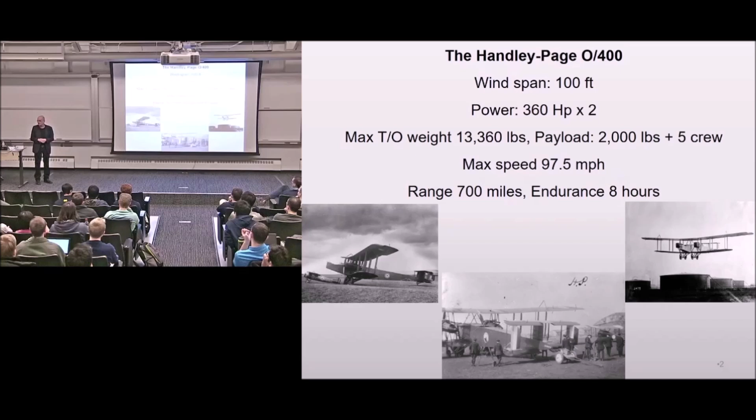So you look at this impressive machine. This was a World War I era bomber that the British built. It was mighty, and it was called the Handley Page O/400. Pretty impressive machine, actually so impressive that for many years later, every big airplane the British built, they called a Handley Page, even though it was built by other companies.

It turns out that during the service of this airplane, as pilots were accelerating and reaching a certain speed, the airplane started shaking dramatically. The shaking came from the tail, and it was so bad that, as a report states, the experience for the pilot is terrifying. There's a reason I used red font for terrifying, because we're going to talk a little later about the psychological issues involved with flutter and aeroelasticity.

So they called a genius of the time by the name of Frederick Lanchester. I'm going to give you some homework: go and look at Wikipedia and look at Lanchester. This is an absolute genius and polymath who did everything from designing cars to developing speed regulators for steam engines, to inventing operations research. He is considered one of the two creators of operations research, and also wrote the first books on aeronautics, inventing vortex theory.

Remember flight dynamics? How many of you took a class in flight dynamics? How many of you know what the phugoid is? He created this term, actually. So this is absolutely... that's what they call him. And he looked at this, and wrote the first report called Torsional Vibrations of the Tail of an Aeroplane, and the British followed through with this.

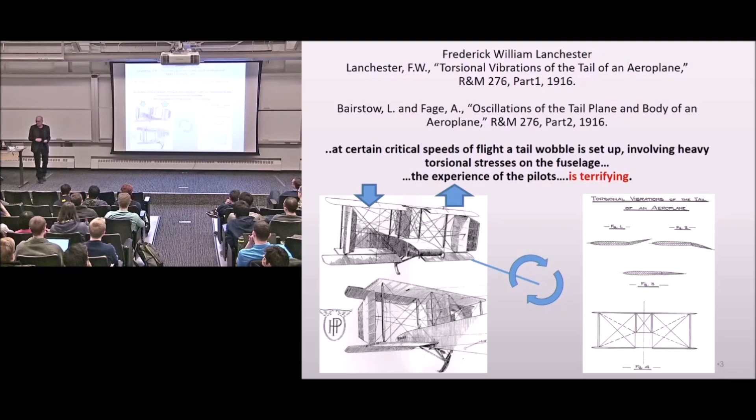This is the first reported incident of what we call flutter, or flutter instability, that interaction between structural dynamics and aerodynamics in a dynamic way on an airplane. So in order to describe the structural dynamics of an airplane, we usually take a very sophisticated model—this is a B-2 bomber, and you can see a very sophisticated mathematical model of it.

We usually don't use for aeroelasticity the very detailed finite element model. We look at the essential motions, so we use a set of shapes of motion. Here you can see some of the low-order mode shapes. I would assume all of you know what mode shapes and natural frequencies of structures are—these are the shapes at which the structure would oscillate if left on their own without damping.

So basically, in order to understand what this is doing, let's describe the motion as a superposition of these shapes. These will serve as what we call generalized coordinates. If I know how much of each generalized coordinate there is—generalized coordinate number one is some shape times how it changes with time, another shape times how it changes in time—these are the generalized displacements. By this superposition, if I know these generalized displacements, I know what this airplane is doing. So I'm going to work with a set of mode shapes and natural frequencies.

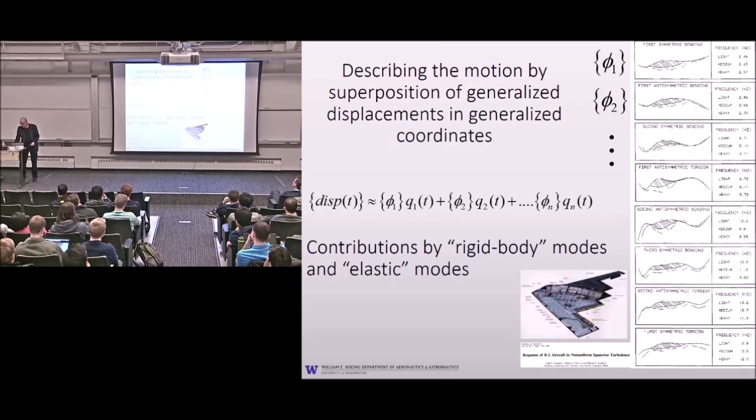Each one of them has its shape, each one has its natural frequency. So the equations of motion for a structure that is linear, limited to small perturbations, when Laplace transformed, will have an inertia matrix, a damping matrix, and a stiffness matrix - that's the structural part.

And since the whole thing is moving, and since aerodynamic forces depend on shape and motion, on the right-hand side you will have an aerodynamic matrix. This is for what I would call self-induced aerodynamic forces - they depend on the motion - and then there are going to be forces that are aerodynamic due to gusts, and some external forces.

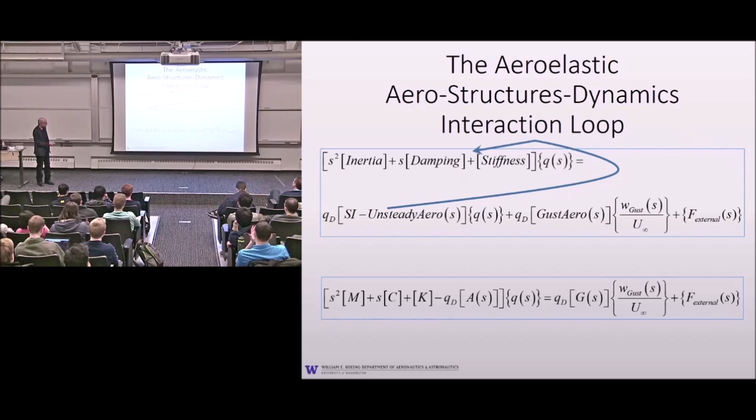So here you can see the inertia terms, the damping terms, and the stiffness coming from the structure. And you see the aerodynamic terms moving to the left-hand side, basically modifying the dynamics of the structure. On the right, you can see the excitation coming from gust and from external forces. So in a way, you can view it as a kind of feedback mechanism of nature.

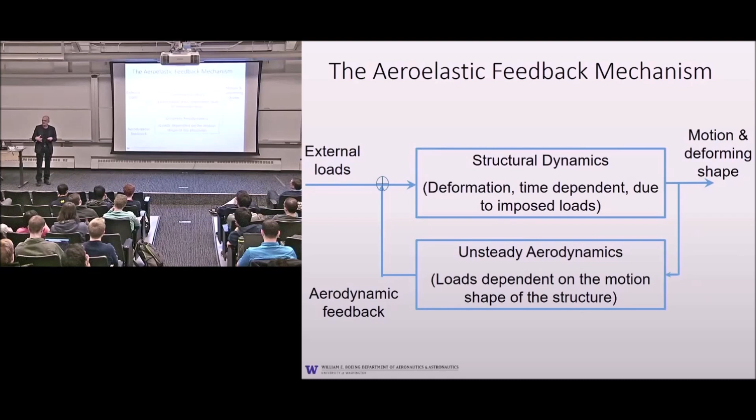Here is the structure. The structure is a system that if you apply force to it, it would respond by some motion. The motion will be a combination of rigid body motion - the whole thing moving up and down - and deformation. But if you have aerodynamic forces, they depend on the motion and the deformation, and then they feed back and modify the forces acting on the structure. So you have a kind of natural feedback loop.

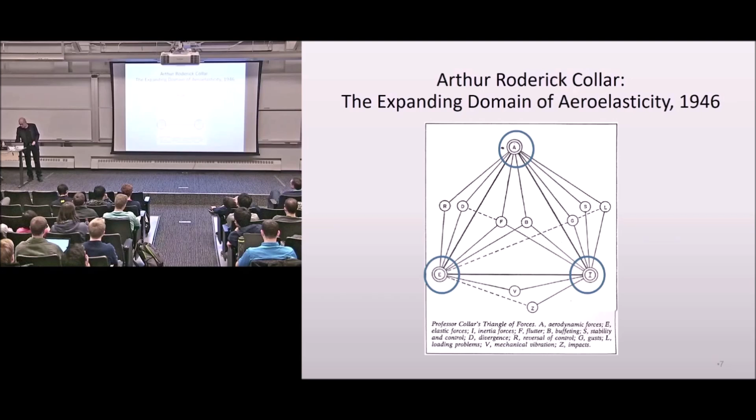And indeed, since the British did pioneering work on aeroelasticity, and some of the greatest contributions were done in the 20s and 30s by the British, it was natural that a British professor of aeroelasticity, A.R. Collar, in 1946 suggested what we call the Collar triangle, saying aeroelasticity is about the interaction between elastic elements, inertia elements, and aerodynamic elements, and all these lines describe different phenomena associated with these interactions.

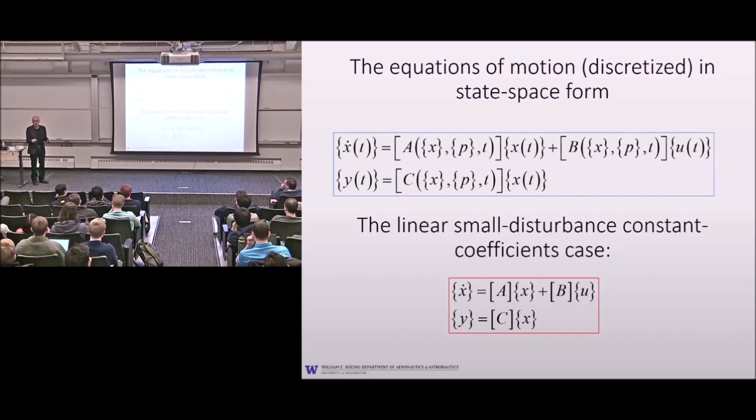In general, this A matrix, B matrix, and C matrix can be dependent on the states. They can be dependent on outside parameters like what Mach number you fly, what you do with the airplane, and they can be dependent on time. But we are going to limit ourselves here to the simplest case, which is constant coefficients.

I hope you all remember from your basic controls class that the stability of a system like this depends on the eigenvalues of this matrix A. They are also called poles, and in general they will come in complex form - so they can be either complex, coming as complex conjugates, or they can be real. The stability of the system is determined by the real part of these poles.

So here you can see the real part and the imaginary part. When the real part is positive and the imaginary part is finite, you have a diverging oscillation. When the real part is negative and the imaginary part is positive, you will have a converging oscillation.

If the pole is real and positive, on the real axis, you have a divergent exponential motion, and if the pole is real but negative, you will have a convergent exponential motion. And if the pole is purely imaginary, then you have simple harmonic motion that does not decay.

So basically, when you look at the mathematical model of a dynamic system, you look at the poles, you look at the eigenvalues, and you look at the real parts. Then, depending on these, you know if the system is stable or not.

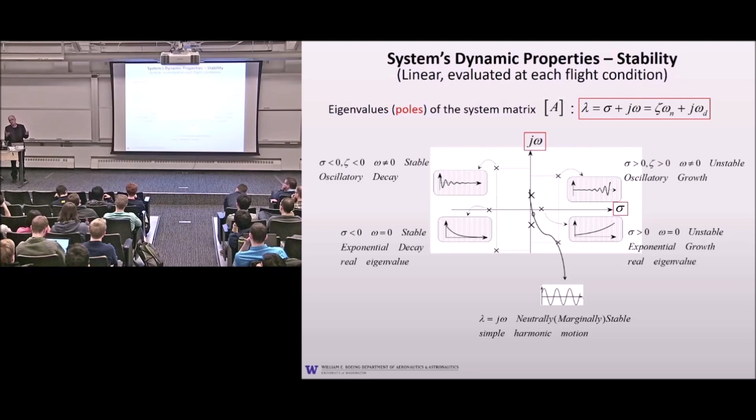You can have all the eigenvalues, all the poles stable with negative real parts. It's enough that one of them has a positive real part and the system will go unstable because there's going to be an oscillation. The limit between unstable and stable, when the system behaves in purely harmonic motion, is what we call flutter. In colloquial English, when you say flutter, you mean the whole unstable behavior once the system goes unstable.

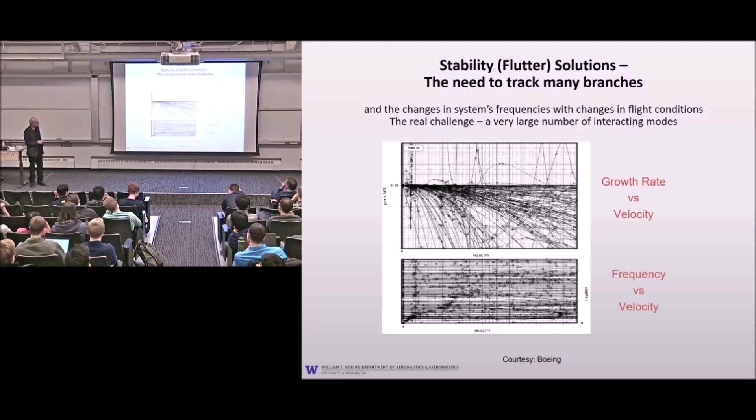Just to give you a taste, I plotted some figures, though usually it's kind of dirty and complicated. This is a Boeing plot of a 737, showing how many eigenvalues and poles you have to track and how they change as you increase the speed. When there is no speed, everything is stable since there are no aerodynamic forces. But as you increase the speed, at some point some of these poles will become unstable and the system will diverge. So it's a huge challenge when you analyze, optimize, and design controllers to deal with systems that have so many poles, so high an order.

When you look at how the system becomes unstable as you increase the speed, it's always a branch, always a pole that crosses from stable to unstable. The question is how it's going to cross.

On the left is what we call violent flutter. This is the damping in a pole. Very close to the flutter speed, you still have a lot of damping in the system. Just imagine a flight test or wind tunnel test: you increase the speed and check, increase the speed and check. Very close to the flutter speed, the system is still well damped. Then you push the speed just a little bit more, and suddenly you are already very, very unstable. Within a fraction of a second the system will disintegrate. I'll show you a movie to give you a feel of what we call violent flutter.

Moderate flutter is when, as you increase the speed, you begin to see a decrease in damping well before it actually becomes unstable. So when you do testing, you can do some kind of extrapolation. You feel the system approaching instability, and that's much easier to deal with when you do flight tests, where the safety of the airplane is on the line. This is what we call moderate flutter.

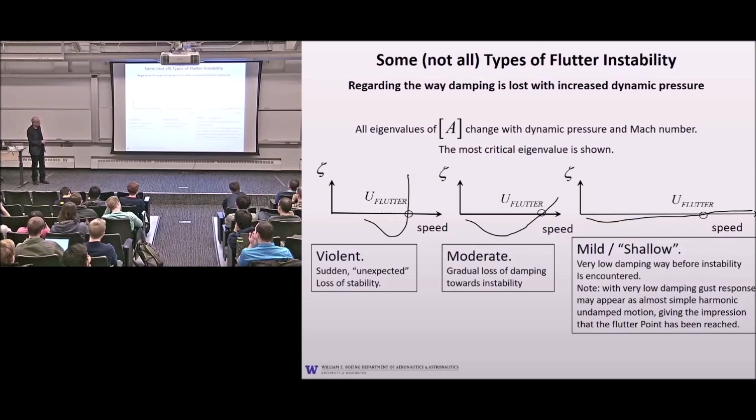This is stuff I'm telling you not only to give you a basic education about aeroelasticity, but because it matters for the issues we're going to discuss: active flutter suppression, and how to apply active control to a system like this. Whether you're controlling a violent mechanism, a mild mechanism, or a shallow mechanism has enormous significance.

Since no system in real life is really purely linear, there are always some nonlinearities. You can encounter the same thing in aeroelasticity. I'm not going to talk much about nonlinearities in structures—this is a fascinating area. Nonlinear systems can behave in crazy ways and are not easy to deal with. But just to give you a taste of one particular nonlinearity, imagine a system where as you push it more and more, you face more resistance.

For instance, imagine an airplane wing oscillating with larger and larger oscillations—the damping of the system, just because of the grinding of parts, becomes higher. Or it begins to hit against some structural resistance and becomes stiffer. So what can happen with a mechanism like this: let's say I fly faster than the flutter speed. The system is unstable, and the airplane wings and parts begin to oscillate.

But as they oscillate at larger and larger amplitudes, they see more and more stiffness. You see the force deformation, the steeper slope here means the system resists it more. So what will happen is something like this: it begins with an instability, the amplitude builds up, but that is against the stiffening of the structure, so at some point a balance is reached, some equilibrium, and the system will not diverge completely. It will keep oscillating with a limited amplitude, and this is a typical example of what we call a limit cycle oscillation.

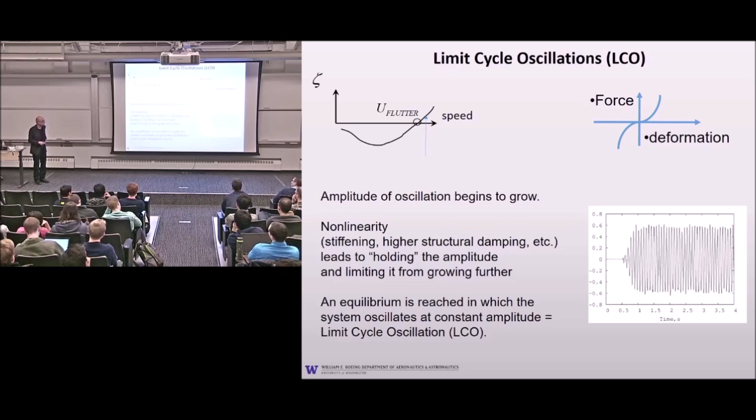Again, it's interesting to know about it, but it will have relevance to some of the stories that I'm going to tell you a little later.

So then how do we define Flutter? We have to agree on the term. We can define it as destructive linear Flutter, where if you cross the Flutter speed, the system will disintegrate. But what about limit cycle oscillation? Is this Flutter or not? The system will begin with some divergence and then stay at some amplitude. So is this Flutter? Is it limit cycle oscillation, or what? We can argue about this.

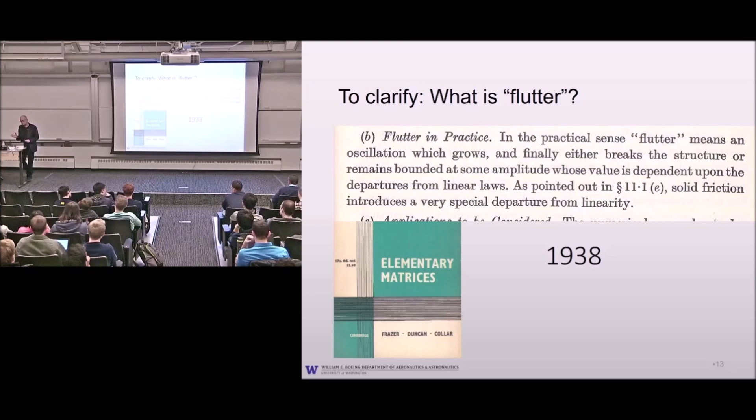We'll go to the British, to a beautiful book written by Frazer, Duncan and Collar, the great British engineers who led the way in aeroelasticity and structural dynamics, published in 1938. Here is how they define it. They say, in the practical sense, Flutter means an oscillation which grows, and finally either breaks the structure or remains bounded at some amplitude whose value depends on the departure from linear laws, and so on. So it's an aerodynamic structural oscillation that can either go unbound or stay bounded, but it has to have an aerodynamic structure.

So we talked about stability. What about a stable system? We have a stable airplane—it doesn't flutter. You push on it, it will oscillate and decay. You hit it, it will oscillate and decay. Now, when you fly, you are subject to disturbances all the time. You're like a boat on a wavy lake. You're an airplane in a gusty sky. So the airplane is shaken by gusts all the time.

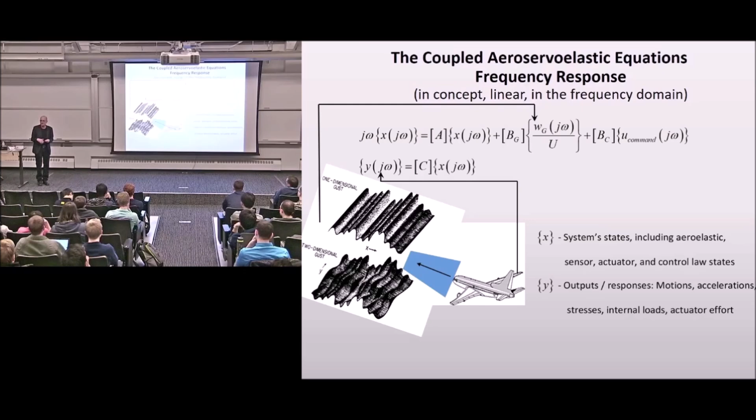Here are the equations of motion now in the frequency domain, where the Laplace variable becomes j omega. Here is our airplane flying into an area of gusts, and so we can solve for the response of the airplane. The airplane is not going to break, it's going to shake—it's going to shake a lot, but it's not going to break because of instability going on its own. By looking at this, and at how much response I get at different frequencies, I can have a lot of insight about what the structure is doing.

As you know, dynamic systems of this kind have their natural frequencies. In airplanes, the structure is lightly damped. So when you subject it to a spectrum of inputs, whether by slowly varying the input and increasing the frequency, or by subjecting it to a random field that hits it with all frequencies, they serve as kind of filters, responding more around those natural frequencies where they have low damping.

So this is, I think, a B-52, flying into turbulence. And you see, these are power spectra—a measure of looking at the frequency content of a random signal. You can see that the airplane basically filters the input and responds mainly around its natural frequencies. But flying them, you can see where those natural frequencies are, and they can behave almost as if, even though subject to random inputs, they oscillate in some combination of sines and cosines.

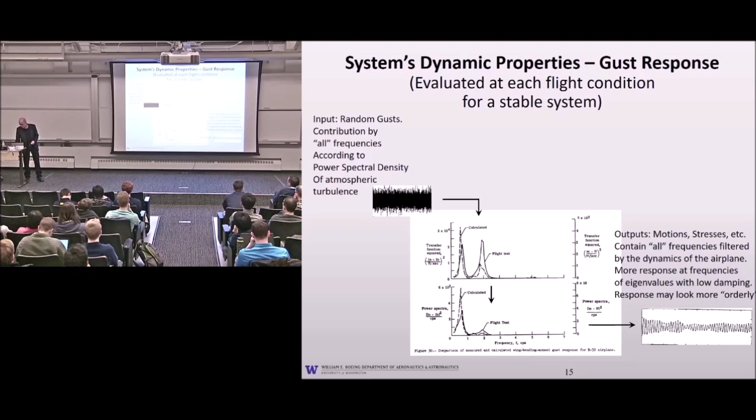So here we can see some beating phenomena, where you have oscillation in two frequencies close to one another. Again, all this may seem just an introduction to aeroelasticity in general, but it's going to lead to what I want to talk about, which is active flutter suppression.

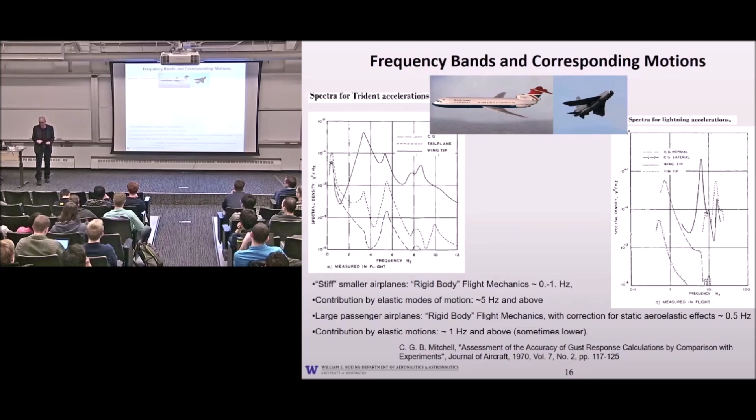The point is that the bending, the elastic frequencies and the elastic motion begins to be really close to the rigid body motion. And if in the past you wanted to design control systems that would control the rigid body motion of the airplane well, neglecting the flexibility, now you can't do it anymore because everything is so close and so coupled.

And so this brings us to a particular type of flutter, which is called body freedom flutter. It's just the name we use, in which the instability is actually not an interaction of some elastic modes, but an interaction of an elastic mode and a rigid body mode. It's usually an interaction between the short period rigid body pitching of an airplane and some form of bending of the airplane.

You can see here a Lockheed Martin sensorcraft, very high aspect ratio, very flexible wing. So sure enough, the bending frequency of the wing is very low. It also is very short, so its rigid body pitch moment of inertia is very small, so its short period frequency is very high.

And when you look at the root locus here, you can see that as you increase the speed, the short period frequency goes up, and the wing bending frequency goes down. The frequencies become really close. You get some strong interaction between them, and one of them goes unstable. So what will happen is the airplane will lose stability in a flutter. It's really flutter, but the flutter involves a mix of rigid body and elastic motion called body freedom flutter.

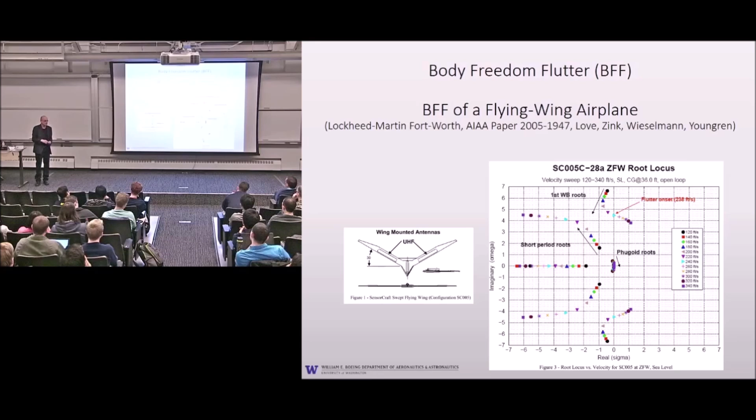So again, those of you interested, I hope I'm going to cause my colleagues some trouble by all of you flooding to the aeroelasticity class, because this is really a cool subject, and I think you can't be aeronautical engineers without knowing aeroelasticity. If you love airplanes, you have to do it. So make their life a little hard, flood their classes and take them seriously. Carlos is going to kill me.

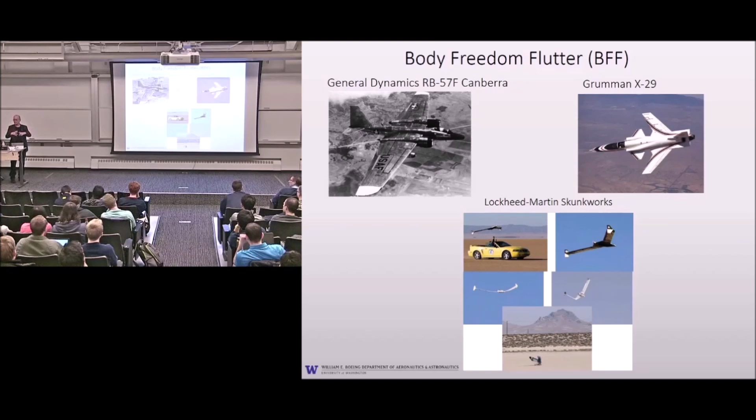Forward swept wings have this tendency, as the speed goes up, the natural frequencies go down. So on an airplane like this, as you fly faster and faster, the first bending frequency of the wing goes down, and it begins to couple with the short period rigid body motion, and you can get this body freedom flutter. And flying wings, this is Lockheed Skunk Works test wing, where you can see body freedom flutter. So when you deal with some unusual configurations, very compact and very short, but with very long and flexible wings, you will get this kind of instability.

So what I want to do now is, now that we've talked about these basic concepts, I want to show you a very short 2-minute video which will give you a taste of each of them, and then we will move on. It's important for you to really have some feel for it, not just listen to the theory, but have some feel for it now. So how do I do this?

Okay, so now you'll see a few examples of violent flutter. Remember violent flutter? It happens very quickly.

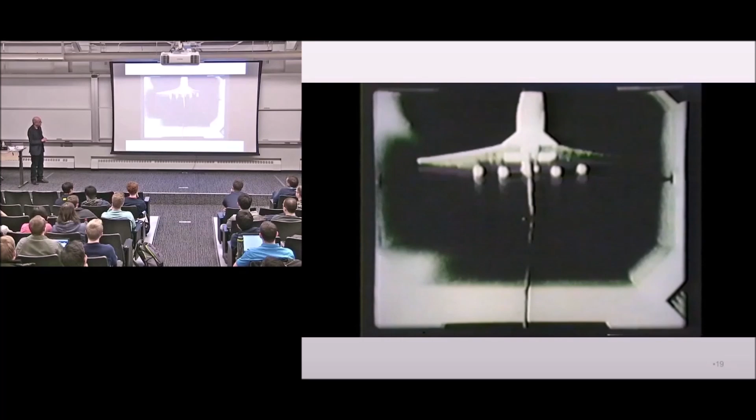And this is it. Now you'll see a case of moderate flutter. It goes unstable, but when you approach it, you see a larger and larger motion, and it takes time.

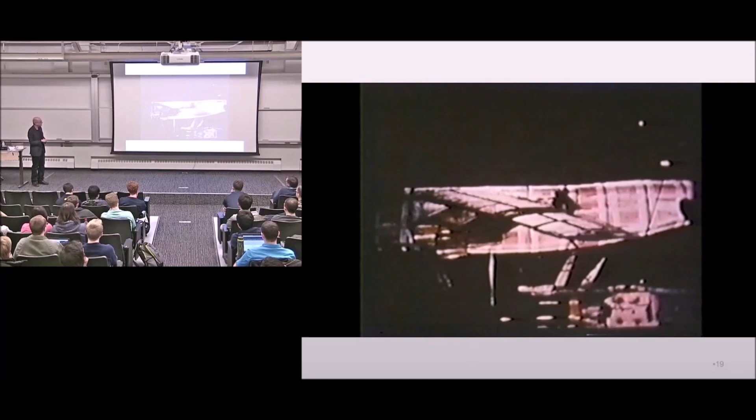This is from the transonic dynamic tunnel at NASA Langley. This is our wind tunnel. This is a very simple wing. It has moderate flutter. As you approach it, it moves, and then it's pretty scary.

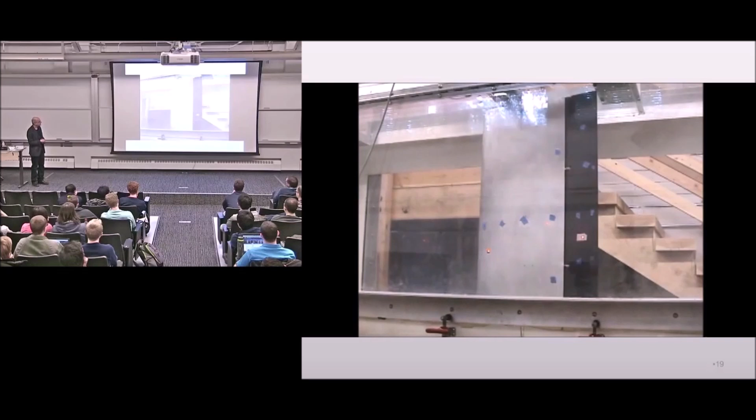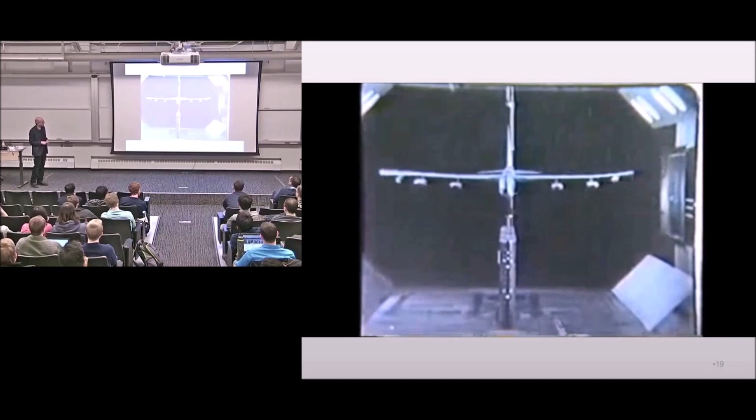And now you'll see a few cases of maybe mild flutter, maybe limit cycle oscillation, again in our wind tunnel, historic Boeing. So you see also that flutter mechanisms - the airplane can go unstable in different shapes, different ways.

This is what's called an anti-symmetric motion. You see that you have a lot of bending motion. This is probably a B-52.

This is symmetric. You better take care of this in design, right? You don't want to fly an airplane like this.

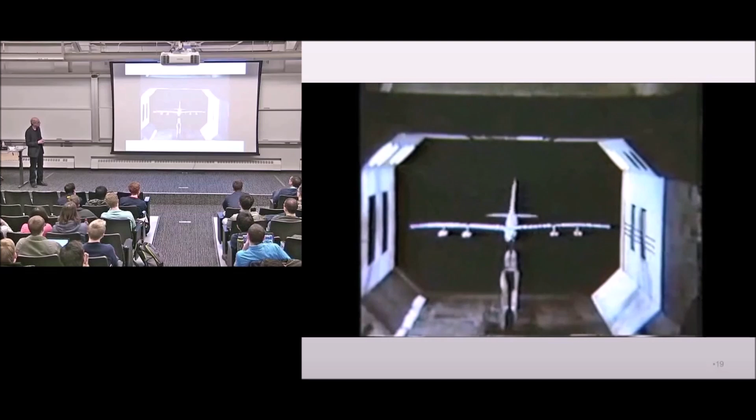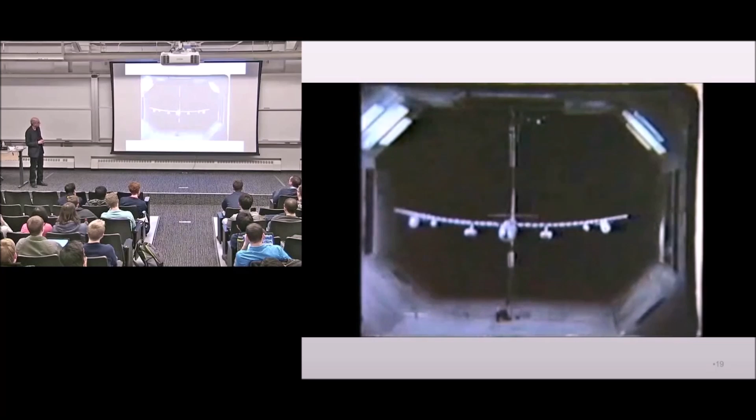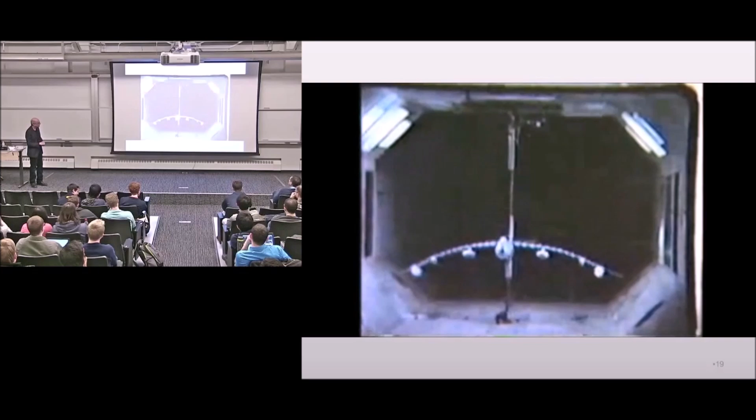And I think next you will see an example of body freedom flutter on a passenger, on a bomber, on a typical swept wing, also taken in our wind tunnel, somewhere probably in the 50s or the 60s. So see how the airplane is pitching up and down as a rigid body and the wings bending up and down. So you have this body freedom problem of coupling between the rigid body motions of the airplane and the elastic motion of the wing.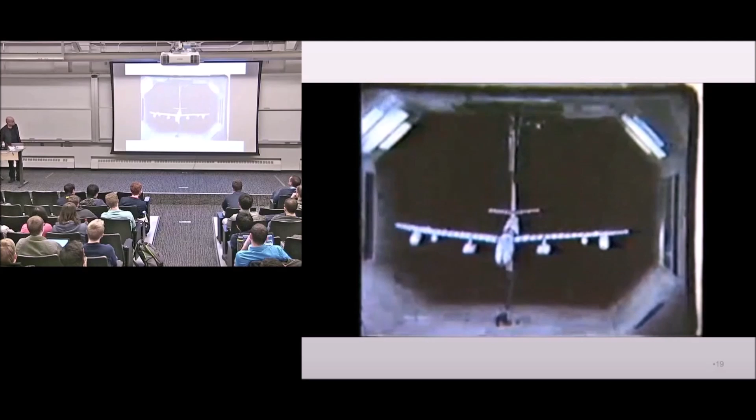So this is all in our wind tunnel done maybe when I was born, I'm not sure. Okay, we got the idea.

So, of course, when you design an airplane, you have to make sure that this never happens. And how is this? How is it?

So in an academic world, usually you focus on research. You don't worry about certification. But you have to remember that everything that you do has to be certified. It has to pass some rules and regulations to make sure that it is safe.

In the aeronautics industry developed over 100 years or so a set of safety factors and design processes that would guide what can be certified or not. It's not enough to design a great airplane. You have to show that you met many, many requirements.

For instance, in the static case, you look at all the possible loads that can be applied. You look at all the maneuvers, all the possible flight conditions, the worst cases, all the possible loadings of an airplane, full fuel, half fuel, passengers standing in line for the bathroom in the back, passengers in the front. You look at tens of thousands of cases.

For each case, you calculate the loads, and you have to show that under the most critical loads that the airplane can ever see, the structure is safe. And then you apply a 50% safety factor to this, where you allow basically failure of the structure at 50% more than the worst case loads that you will see. So this is what we say limit load and ultimate load.

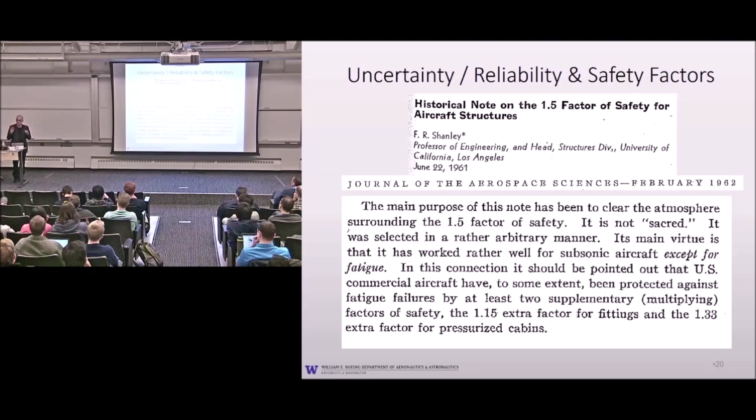How did this come about? So I dug out into the history and I found this very interesting article by Shanley, who used to be a professor at UCLA, about, honestly, how they came up with this factor. But this factor is still with us today. So every airplane that the FAA certifies has to meet this factor. You have to show that the worst case scenario is covered and that the airplane would not fail at 50%.

What did I do? When it comes to flutter or gust, the FAA requires that you work within what we call a VN diagram. How many of you have seen it in your airplane design courses? So what you see here, you see speeds and you see load factors, which basically the accelerations of the maneuvering airplane. And I'm not going to talk much about it, but this will cover all the possible maneuvers as combination of speed and pulling up acceleration.

For us right here, so there are different speeds. There is VA, which is the maximum speed of the maximum maneuver allowed. There's going to be V cruise, which is the speed at which the maximum gust loads would be applied. And there is VD, which is called design dive speed. This is the highest speed that an airplane can ever see.

And the requirement of flutter is that you have to show that your airplane is free of flutter up to 15% more than design flight speed. It used to be 20%, but a few years ago, with more confidence in the tools, it was reduced to 15%.

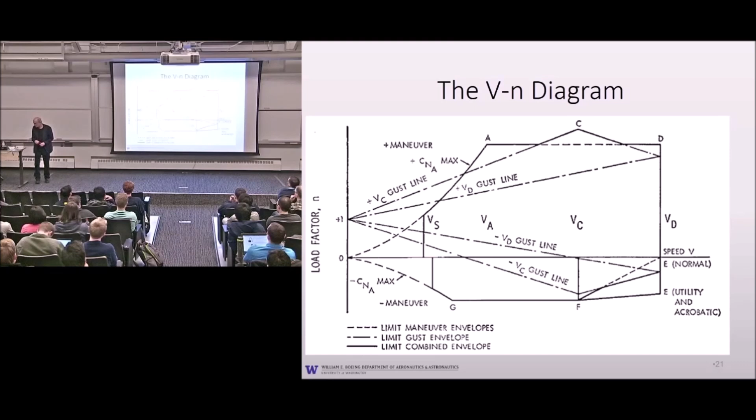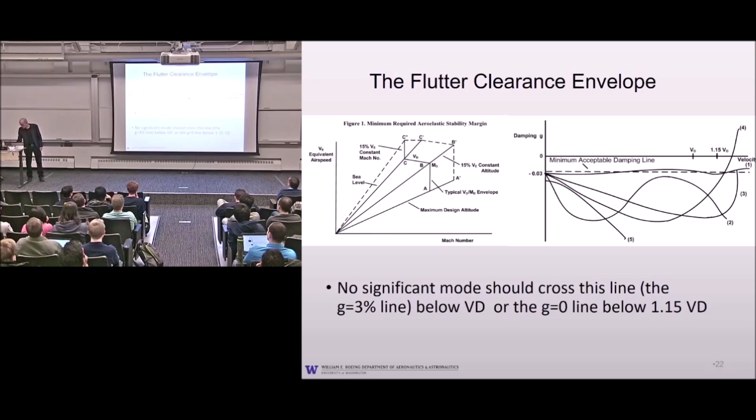So I promised I'd tell you stories. I told you about the Handley Page. I showed you a few videos that I hope you remember. Rest assured, by the way, that the airplanes you are flying, even when they shake like hell in turbulence, even when you pray to God because you land in Seattle in the winter and the airplane is swaying and shaking, they are not going to flutter. They are well designed for flutter.

Here is a story. This is a fighter jet. This was actually, I think, the first operational supersonic jet that the United States built. This is the time of the Korean War in the 50s, and this is the Super Sabre, the F-100. It's very interesting—it flew Mach 1, so it was the first operational Mach 1 airplane. In order to do this, those of you who love airplanes know you have to have very thin wings because you have to reduce what we call shock-induced or wave drag.

So the wings have to be very, very thin, so they have to be very, very flexible. They had to redesign the tail. The way they did it, you have an all-movable tail, so the two tails move together. There is an actuator buried somewhere here. The moment arm of the actuator goes below the exhaust here, lo and behold, and there is a hydraulic actuator that pushes these back and forth.

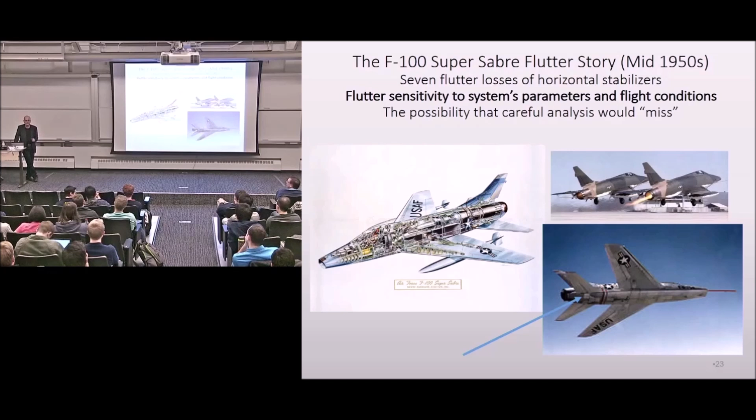Just imagine today—this would go to Wall Street, this would be in the news, this would lead to the CEO of the corporation basically being fired on the spot. Just remember, sending an airplane again and again and again, and 7 times losing the tails until they figured out what to do. The message here is that flutter behavior is extremely sensitive to changes in the parameters of the system. A hot day, a cold day, a little damage here, a little damage there—things like that can completely change the flutter behavior. So when you certify an airplane for flutter, you have to make sure that you covered all your bases, that you have not neglected even one possible change.

There's another story. This is an Airbus A310 operated by Air Transat, a Canadian company. It took off in 2005 from Cuba on the way to Quebec. Somewhere along the way, the pilots felt something was strange. They didn't know what was going on, but the airplane didn't feel right. They felt something was awfully wrong. They managed to turn around and land back. They looked at the tail—they had lost the rudder.

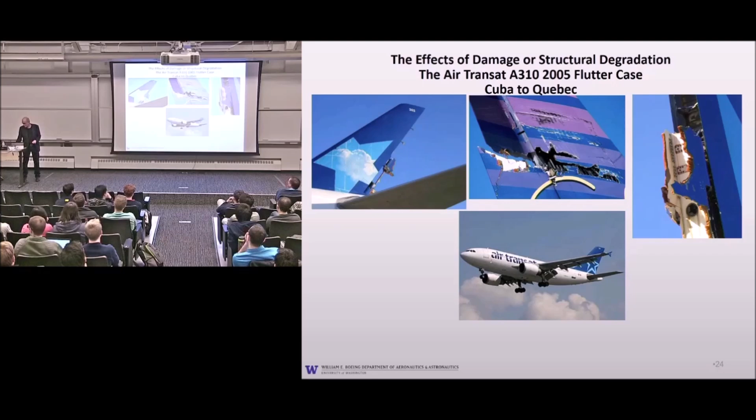So why did they lose the rudder? It was built by composite technology where somebody didn't pay attention, and the way it was built did not protect it completely from moisture, so it absorbed moisture, and over cold and hot cycles it froze, expanded, froze and expanded, and slowly the stiffness of the rudder and the stiffness of the connections to the rudders deteriorated, and they lost the rudders in flight. So things like that can get you into trouble if you don't take care of it a priori.

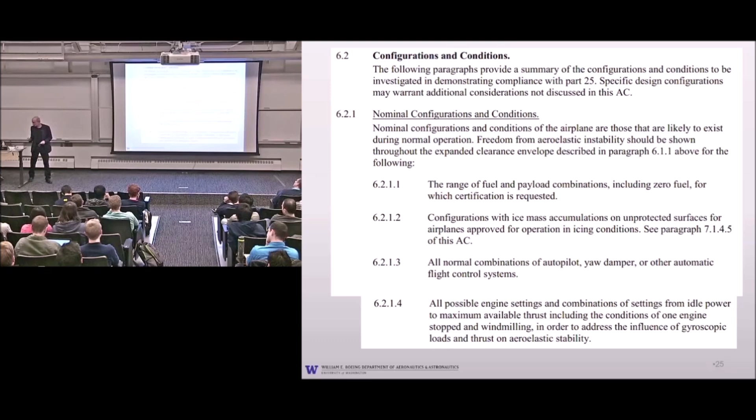This is just very quick to show you, from the certificate, the regulations. The FAA, in order to certify an airplane, you have to be half an engineer, half a lawyer. You're laughing, but if you think for a minute that it's all about mathematics and testing, forget it. It's about government regulations, insurance rates, a lot of lawyerly kind of stuff. So this is from the FAA regulations. It shows you how you have to cover every possible nominal configuration and condition. You also have to cover every possible damage, and show the FAA that you did that, otherwise it wouldn't certify your airplane.

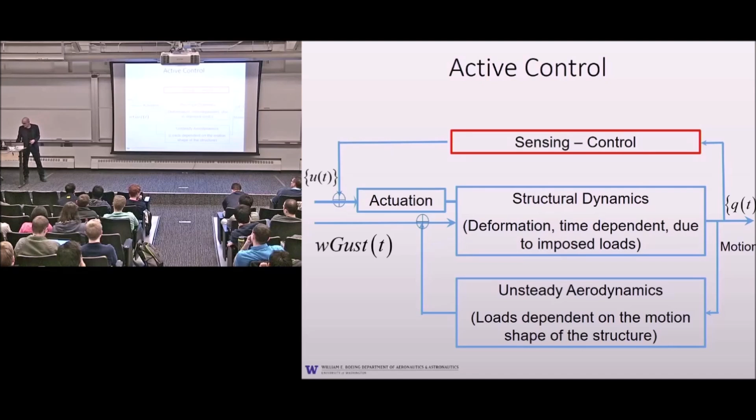So if flutter behavior is the result of a physical feedback mechanism where aerodynamic forces feed back, then why not use active control and add another feedback loop? Why not measure what the airplane is doing, sense it through an accelerometer or strain gauges, have a controls computer that, using some control laws, drives actuators, and these actuators also modify the motion of the structure. In our case, in the simplest form, let actuators operate control surfaces - the tail surfaces, the flaps. So if the airplane is shaking too much, or approaching instability, let the control law stabilize it. Let the control surfaces move in a way that stabilizes the system, and this is what we call active control.

The idea has been around for a long time, but people were afraid of it. The fear was, what if something happens to the control system? An actuator gets stuck, the computer doesn't work, so what's going to happen? Some work on this was done in the 50s and 60s, but nobody dared putting it on an airplane until the YF-16. This was the competition of the early 70s for the United States lightweight fighter. The YF-16 competed against the YF-17, and one of its innovations was that it was a relaxed static stability airplane.

This is assuming, forgetting that it is flexible - and it is flexible, by the way. This is an airplane I spent a lot of my life on, and when you see an F-16 on display in some exhibit, go push on the wing, and you will see you can bend the wing with your hand. It is so thin and so flexible. Just considering rigid body motion, they allowed the airplane to be unstable in order to gain some performance benefits.

By that time, some things happened. The actuators available became faster. In the past you couldn't do it - actuation was cables and rods, they just didn't have enough speed. Now you have hydraulic actuators that are very capable, so you can deal with phenomena at high frequencies. Computing became more powerful, so you can have a computer that's fast enough, controllers that are more established. Control hardware improved, the math modeling improved, the control law synthesis matured, and now you have better ways of designing controllers. The push for effective airplanes was unrelenting.

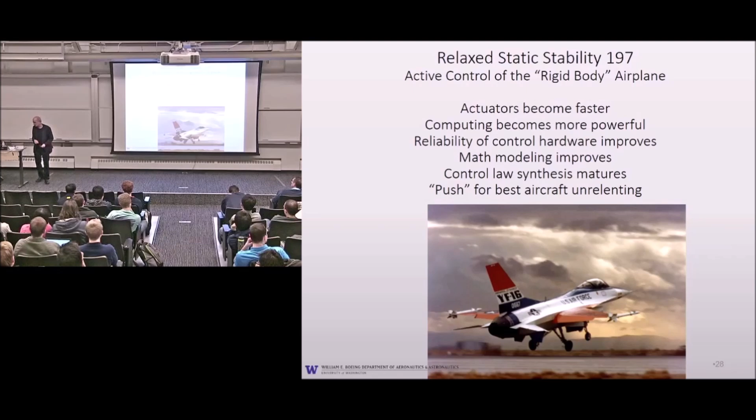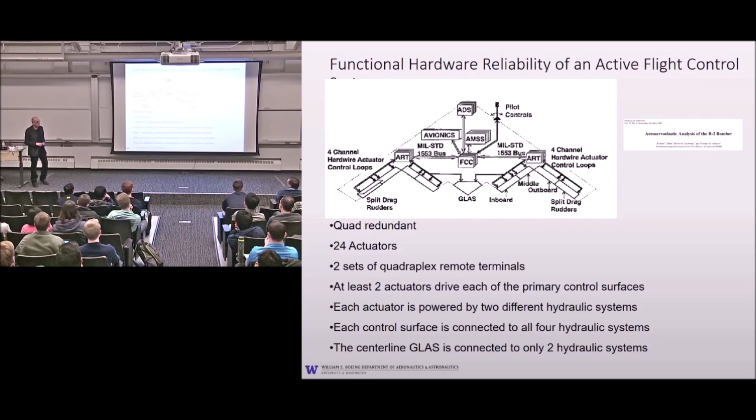So you can lose 3 systems and still the airplane will be operational, which means the hydraulic lines, the servo actuators, the controls computers, the control hardware, everything has to be quadruple redundant in order to make sure that whatever happens, the system would never lose control because of it.

So as control and the control aspect began to be more and more important, now was an opportunity to look at what it would take to apply it not only to a statically unstable airplane, which is mainly rigid body, but to a flexible airplane. And maybe we can use active control to fight against Flutter.

And so in 1997, actually, but then in 1999, Peretz Friedmann wrote a very nice paper, which was an overview of aeroelasticity. He took the collar triangle - elastic, aerodynamic, inertia - and he added a thermal effect, which is very important when structures get hot and the stiffness of the structure becomes a function of temperature, and then control. So now we have this hexadron which captures all the possible interactions, including active control.

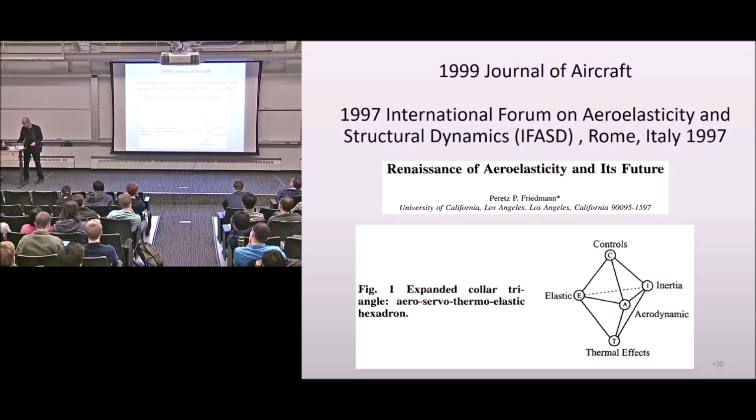As I said, the idea was around for a long time. I can show you papers that go to the early 50s, which talk about the possibility, but the technology was not there. Actuators were not fast enough, controllers were not good enough. It's only in the mid-70s, towards the end of the 70s, that it could apply to rigid airplanes, and only in the 80s and 90s where you could apply it to flexible airplanes.

This is from the classical book on aeroelasticity by Bisplinghoff, Ashley, and Halfman, published in 1955. In the introduction to the chapter on Flutter, they say there exists an excellent possibility of improving Flutter performance by somehow installing in the structure a properly designed, rapidly responding automatic control system, actuated in closed-loop fashion by the motion of the structure to be stabilized. However, we cannot count on the human pilot to compensate for Flutter because it's too fast, and the human pilot cannot compensate for this.

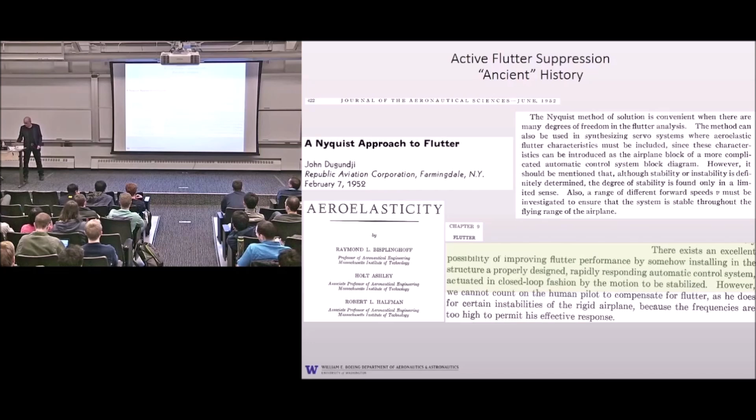One of the things that, in addition to the development of technology, triggered more interest in active Flutter suppression was the saga of the American SST. Most of you were not even born. In the late 60s and early 70s, the United States worked on an SST, supersonic transport, in competition with Concorde. It failed miserably, and it was stopped, basically, around 1971. That almost led to Boeing going bankrupt, because Boeing was the center of activity on this.

One of the reasons that led to the failure of the American SST was a Flutter problem. It's a very flexible, long airplane, like a flying needle. The methods of the time were not good enough to develop a design that would be good for Flutter and lightweight. In airplanes, weight is a critical issue, let alone a supersonic airplane, where every gram is important. The only way they could solve the Flutter problem was by adding something like 10,000 pounds to the airplane, which completely killed the project. There were other reasons why the project was killed.

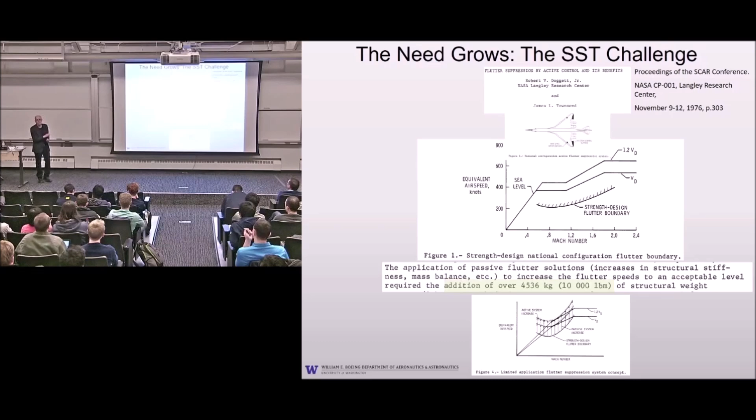But you can see that drove a lot of interest in active Flutter suppression, because if I can solve the Flutter problem by active controls, by using the control system to move the control surfaces to eliminate the problem, I would save all this weight and make the design possible.

So active Flutter suppression then can be viewed in two ways. One way, you can view it as a way to fix things. So after you design an airplane and you discover a Flutter problem and you can't find a way to solve it, then you use active controls to fix it.

And this is the case of the F-18, and this is the case of the Boeing 747-8, and this is the case of any Air Force operating fighter jets, because each fighter jet - you designed the F-16 in 1974-75, still new missiles, new bombs, new electronic pods. Each configuration like this is a different Flutter story. You have to deal with tens of thousands of configurations.

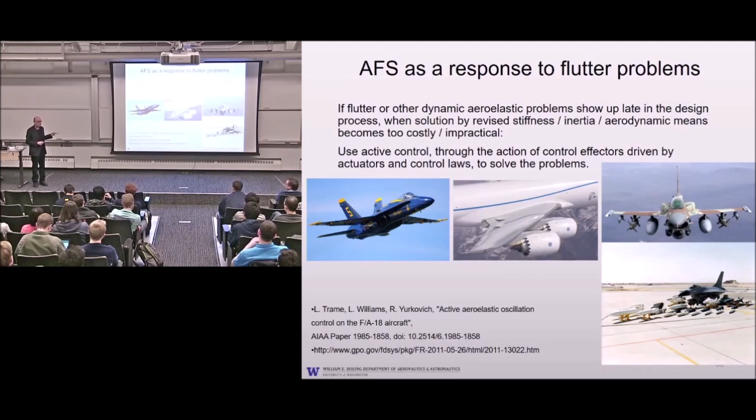Fuel tanks, yes or no. Missiles, yes or no. One missile, two missiles, this bomb, that bomb. Every configuration is a different dynamic system, different natural frequencies, different Flutter mechanisms. How do you design an airplane that will be okay for things that are going to be built 25 years later? So if you could use an active system to deal with it, that would solve your problems and make your life easier.

Remember this statement about the human pilot not being able to do active flutter suppression.

In 1986, two crazy people, actually, and their genius relative flew for the first time an airplane around the world non-stop. It was called Voyager. If you have some time, I recommend you look it up—not the Voyagers that went to Mars, but the Voyager airplane. They flew in '86 for 9 days at about 160 miles per hour.

The airplane was a marvel of design, extremely flexible. You can see it taking off. Actually, when it's taking off, it is so heavy with fuel that the wings scratch the runway and they lose the winglets. Only after they took off did they send a chase plane to look at the damage and decide whether to go back, and they decided to continue.

Here is the airplane in flight. Look at the kind of flexibility—this, by the way, is one of the things Carlos is dealing with now.

It turns out these are Dick Rutan and Jeana Yeager, the pilots. Dick Rutan is the brother of Burt Rutan, this genius designer, now retired, who lived in California in the Mojave Desert and designed crazy airplanes. Here he is with President Reagan getting the National Civil Medal of Merit for their pioneering.

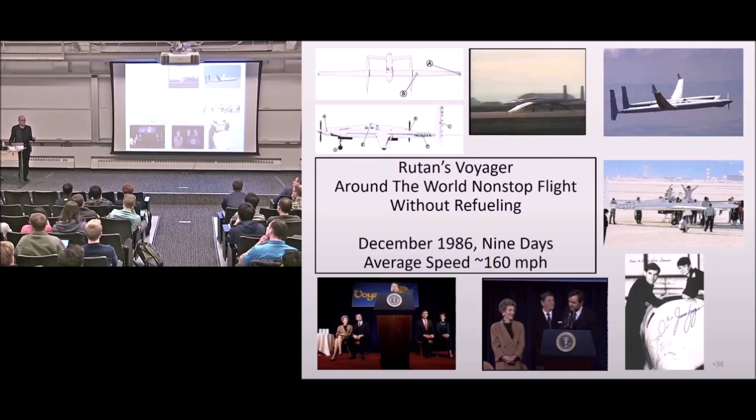Now I want to talk about Dick Rutan. Burt was the designer of the airplane, Dick was the pilot, and Jeana was his girlfriend at the time. Dick Rutan was an ex-Vietnam era fighter pilot who had hundreds of sorties over Vietnam, including being shot into the ocean and being saved. He's a pretty brave guy, pretty tough guy.

This is a book I really recommend you read by them. He talks about the airplane. He says: we flew at the heavier weights, the flapping became serious. The flights were showing that at exactly 82.5 knots of speed, the flapping of the wings went out of control. The oscillations became divergent. The flapping began to increase in height, doubling with each cycle. Unless the pilot or autopilot stopped it, the wings would literally flap themselves off in about 10 or 12 seconds. If you let go of the stick, this airplane would come apart.

They had a body freedom flutter problem. They didn't tell anybody. Since he was such a good pilot, and since the frequency was low, he solved it by basically sitting on the stick and pushing against it. With time, he realized that if he pushed at a 90-degree phase, he could manage to solve it until they burned enough fuel and the airplane changed and the problem disappeared—because remember, flutter depends on loading, things like that.

Look what he says here: 'Unlike Jeana, I hated the airplane and feared it. This is a seasoned fighter pilot—it was the only airplane I had ever been afraid of. I had never gotten used to the flailing wings. I would tell myself that the structures would take the motion, but I wasn't ever really convinced. It was a gnawing, grinding fear, and it never went away. For the first time in my life, I actually felt empathy for those afraid to board airliners. So during the months when we were grounded for the installation of the new engines, I pursued a thorough course of therapy to conquer this fear.'

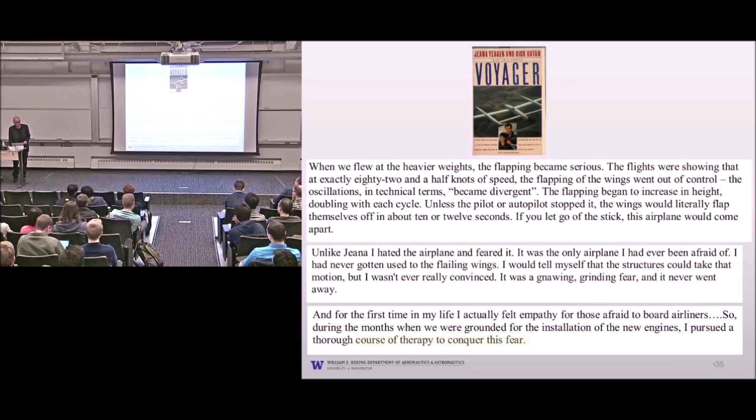Remember the statement from Lanchester about the terrifying effect flutter had on the pilots of the Handley Pages? Here is Dick Rutan—basically he says they never told anybody because they were afraid the program would stop. He managed, so this is a first case of active flutter suppression by a human pilot, sitting on the stick and figuring out how to do it until the airplane is light enough and the dynamic is changed. Now, do you think this is going to be certified by the FAA?

I don't think so. Here's another case: the F-18. The F-18 had a serious anti-symmetric oscillation problem—it was a flutter problem. They knew that if they named it correctly, they would suffer grave consequences. So they said it's not flutter, it's an oscillation problem.

And they managed to solve it by luck. Their control system had a gyro that sensed the rolling motion well enough so that they could feed a signal to the flaps in order to suppress this. How do I know about it?

I was in the Israeli Air Force at the time. There was a possibility that Israel would buy the F-18, so we sent two test pilots. These were very seasoned pilots who worked with me on flutter testing where airplanes shook like crazy. They were brave guys. They came back from St. Louis really shaken, telling me, 'Eli, my God, this F-18 is shaking like hell. What is going on with the airplane?'

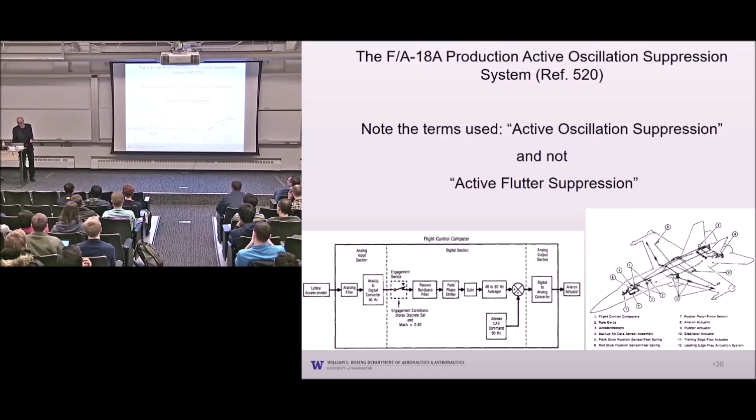They wouldn't call it flutter. They called it active oscillation suppression. Later I found out from my connections that somebody had forgotten they engaged the system for the test flight. So this was active flutter suppression solving problems.

My vision has always been that this is a technology that, if you harness it from the start and use it from the beginning of the design process as part of your design process, can revolutionize the way airplanes are done because it saves a lot of weight. This figure is mostly taken from my own PhD, except I replaced a fighter airplane with a more civil airplane, since I like working on civil airplanes more. It argues that if at the beginning of the design you can optimize the structure, the aerodynamics, and the control system simultaneously, you can save an enormous amount of weight.

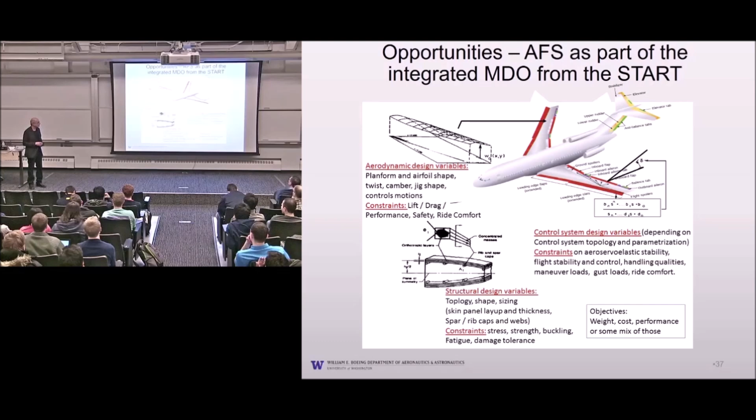And so here is actually from my PhD. You can see a drone, like this one NASA built in the 80s to look at active flutter suppression. I showed you in the video how they lost it to flutter - remember, this was the first case where the wing just went 'bzzzt' and was gone. So they lost it. But I created a mathematical model, and then I ran some optimization.

Here is the weight of the skin when I only play with structural design variables subject to gauge and stress constraints, then gauge, stress, and drag constraints, and then gauge, stress, strength, drag, and flutter constraints. You see the enormous penalty in weight that you need in order to stiffen the wing enough for flutter.

And then you add control variables, and the active system allows you to take most of the weight out. And when you add aerodynamic variables, you basically go back to a structure as if there's no flutter problem at all.

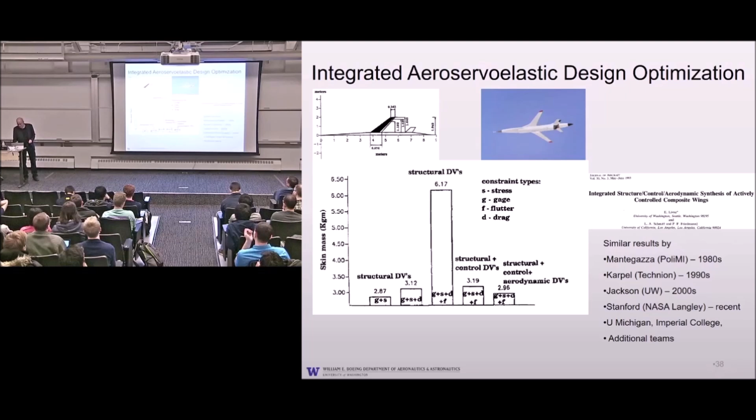So today on an airplane, you already have a number of active control systems in action. You'll have, at the center, what we call a maneuver load control system. In response to maneuvering, measuring G and acceleration, the flap will come in and out in order to distribute the load properly on the wing in order to reduce stresses and save weight.

You'll have a fast system that responds to gusts in order to reduce dynamic stresses due to gusts. This is now available on all flying airplanes and is certified because these systems are for stable airplanes - they just deal with minimizing dynamic stresses. And you have what we call ride comfort, an active system that reduces the shaking so that passengers or pilots...

...this is on a B-1 bomber. This is a strategic, supersonic bomber that changed mission from the time it was designed. It was supposed to carry nuclear weapons and hit the enemies - Russia, China, whatever. By the time it was developed, they had such good ground-to-air systems that this mission became impossible.

So the mission was changed, with the airplane basically flying at treetop level, very, very low, to penetrate defenses. Guess what? When you fly long distances at treetops and have to go over mountains, the shaking of the airplane because of gusts and winds was so hard that the pilots couldn't take it - they just couldn't function anymore. So they had to add these little canards here, which are actively controlled. They measure the vibrations and counteract the shaking.

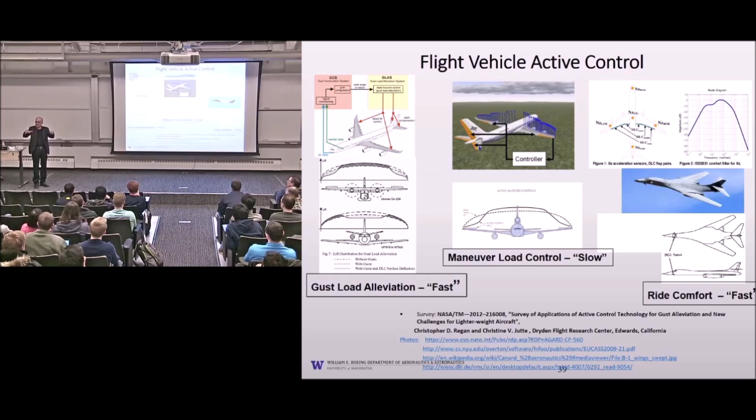So you already have some forms of active control systems, but even with the technology today, problems can happen. This is the Boeing 787-9. Here is an article from Aviation Week about how they learned from the 787-9 to help with the 787-10. And look what they are saying - an unexpected interaction happened.

They designed the maneuver load system to respond to acceleration of maneuvers, which is slow. But they forgot that the accelerometers will also respond to fast oscillation. So that system began to deflect the spoilers in a way that shook the airplane so severely that they had to stop, go back, and redesign the control system.

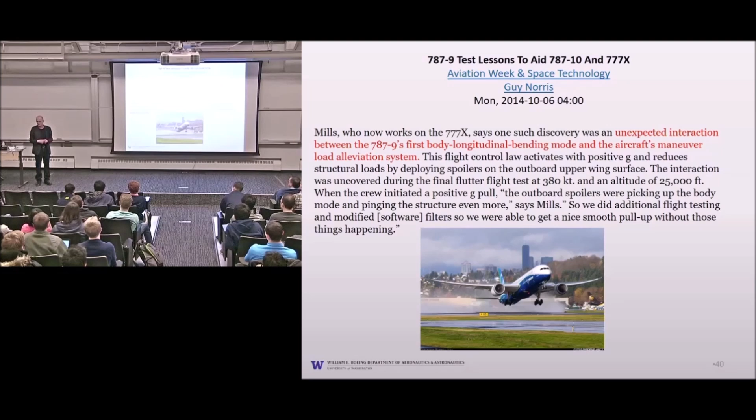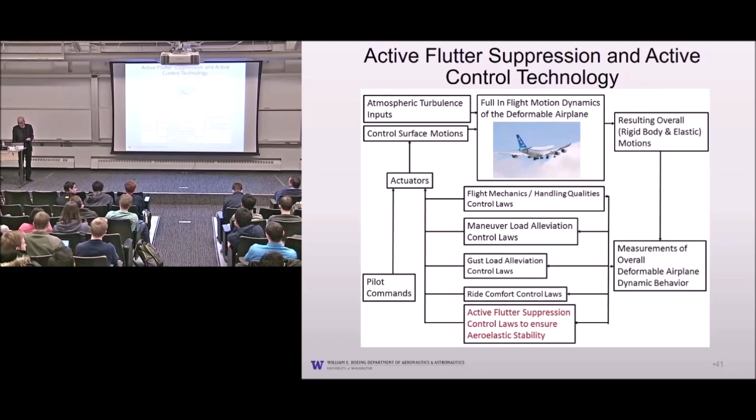Message here is when you have a number of control systems on the airplane, here we are. We have a system that helps with the rigid body motion of the airplane, what we call handling qualities. We have a system that controls maneuver loads. We have a system that controls gust loads. We have a system that controls ride comfort. Now we want to add a system to control flutter. All these systems have to work in harmony. You cannot neglect the possibility of bad interaction between them. So you have to show that all these systems work in harmony.

Here are some cases where flutter suppression was demonstrated on real airplanes. This is the NASA drones for aeroelastic and structural testing program in the 70s. This is an amazing piece of work by Boeing Wichita with funding from the Air Force. They took a B-52, modified it by adding control surfaces and reducing its flutter speed. It carries some external fuel tanks on the wing, so they added ballast weights to artificially and deliberately reduce the flutter speed of the airplane. Then they used active controls and flew the airplane beyond its flutter speed, demonstrating that the active control system could do it. This is the Germans, MBB, together with the US Air Force on an F-4.

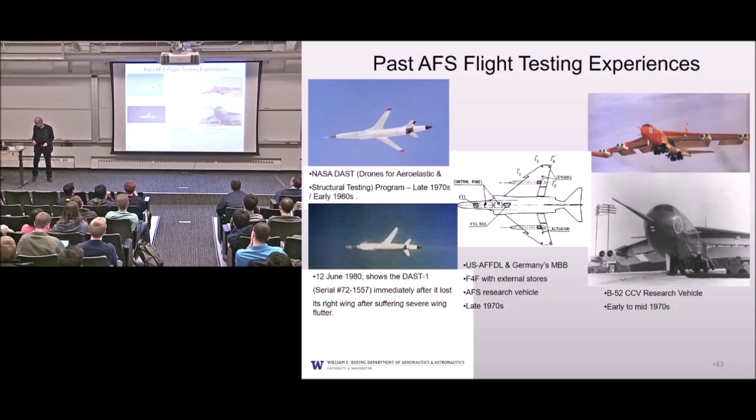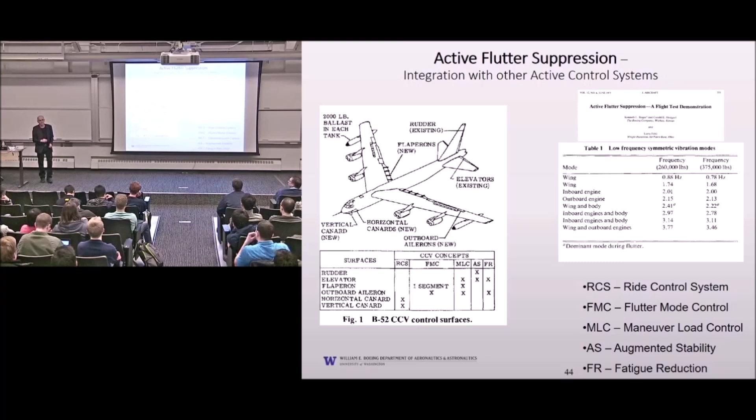So here is the B-52, and you can see they used outboard ailerons. They have new ailerons, the airplane is heavily instrumented, and they add the ballast weights. They have these five systems working together in harmony: the ride comfort system, the flutter mode control system, the maneuver load control system, the stability augmentation system, and what they call fatigue reduction, which is very similar. This was done in the early 70s.

More recently, Boeing had serious problems with the 747-8, the new 747 derivative. The airplane would get into a limit cycle. They started with a cargo version, followed by a passenger version. Boeing is struggling, like Airbus with the A380 - there's a struggle with these large airplanes, there isn't a lot of market for them. It's a beautiful airplane, and at some speed, some altitude, the airplane encountered what they called limit cycle oscillation. The airplane begins to shake, and they couldn't solve the problem. Just couldn't solve the problem.

The only way they could solve the problem is through active control. He got into an argument with the FAA.

Now, how do I know all this, by the way? Boeing doesn't talk about it, but I have a lot of connections at Boeing. I have many of my students there, and I know a lot of the managers. This is a serious issue, very sensitive. All I know is from what was published in the newspapers and by the FAA, but that was enough to tell me what was happening. I think I know with quite confidence what really happened. I think that Boeing... this is going to be taped, God forbid. There can be an argument here. My colleagues at Boeing are going to kill me. But again, everything I'm saying to you is in the open literature.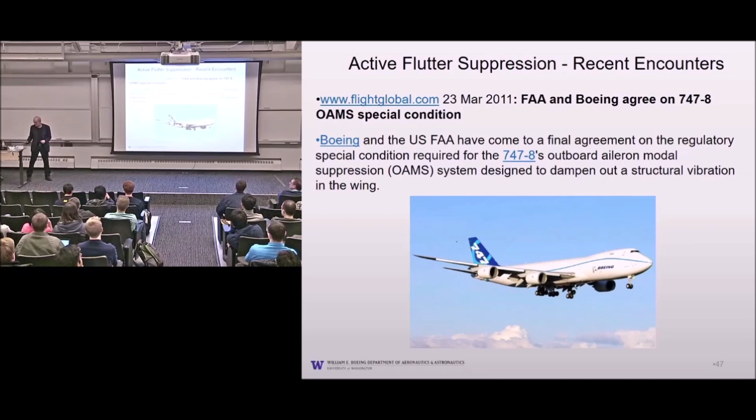And then the story repeated itself on the 747-8 and the 787-10 passengers. This is a new version, just began to fly a month or two ago, where they lengthened the fuselage. I read the newspapers, and I look at the FAA publications. Anytime the FAA wants to publish a special condition, they advertise it to the public and wait for comments before they do this. So I follow this, and even without anyone telling me, I get an idea of what's happening.

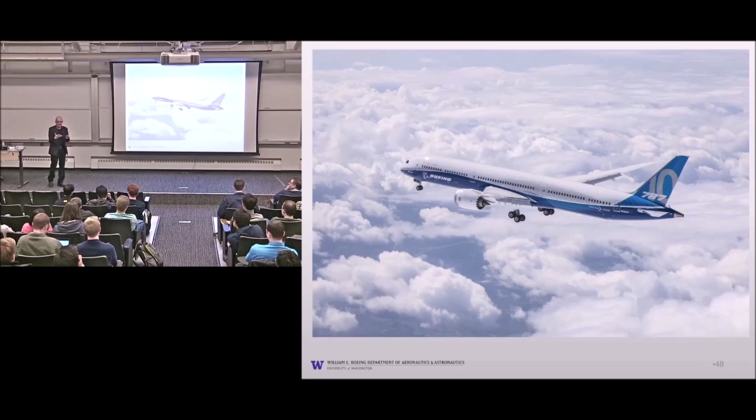It turns out that Boeing, doing flutter analysis of the 787, could not match the 3% damping requirement. Remember I showed you the requirement was that up to design dive speed, you have to show at least 3% damping. They can't - they have one mode where they can only get 1.5%. So with a special condition, the FAA allowed Boeing to use an active control system, which is an active flutter suppression system, on the 787, but it's on a stable airplane.

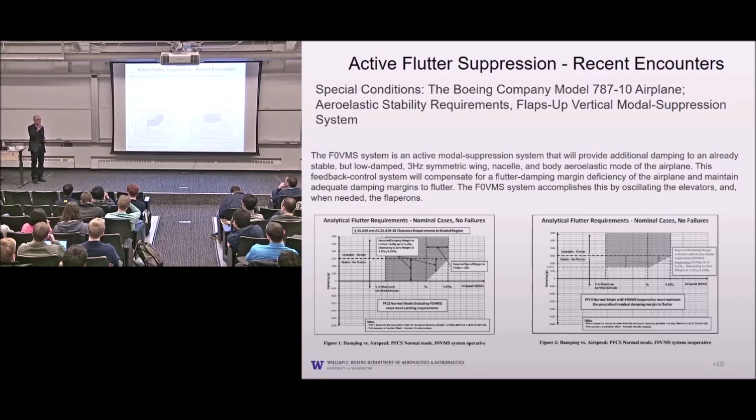So again, even though I'm sure that system would never fail, it will have all the redundancies, all the reliability - even if you want to imagine the worst case scenario, you're dealing with a very stable airplane, except that it didn't have the exact level of stability that the FAA requires.

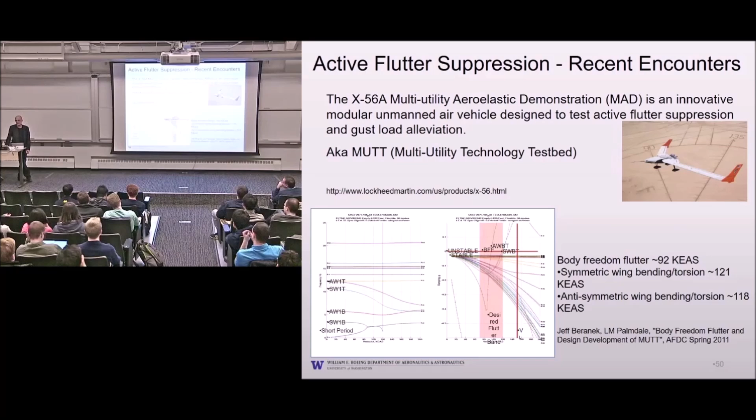Right now, it's the only machine of this kind used in flight series for active flutter suppression, except for an effort at the University of Minnesota, which has a very nice center dealing with it, and some efforts in Europe to do things like this. You also have Carlos Cesnik's X-HALE - those of you who don't know about this work, I encourage you to look at it.

So what is the challenge? What do we need to do in order to put an active system on an airplane with the confidence that it's going to be okay, so that it will allow us to save all the structural weight? We have to deal with high-order mathematical models, so we need good control synthesis techniques that allow you to work with high-order systems. The systems are all multi-input, multi-output, multi-function - we have to deal with many things: ride comfort, maneuver load, flutter suppression, and so on.

The systems are parameter varying - they change as you change Mach number, as you change altitude, the system is changing. If you eject stores, if you burn fuel - you have to cover all these cases. There is significant uncertainty in the modeling, so you have to look at all the possible cases, and with some acceptable probability, you have to show that you cover all these cases.

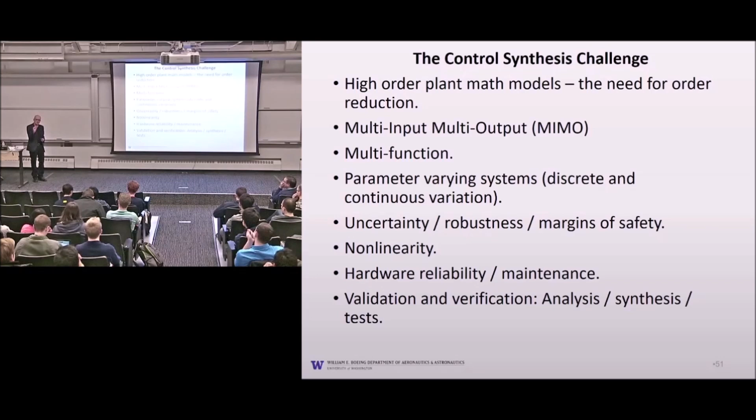The systems may be nonlinear. You have to make sure that the hardware is reliable, and you have to have what's called validation and verification. You have to design the system in a way that will allow outsiders to validate it. You can't come to the FAA with some fancy controller built on some beautiful mathematical theory which ends up in a black box where people don't have a feel for it - they are very reluctant to accept things like this. So you'll have to show what your system is doing in a way that people would understand.

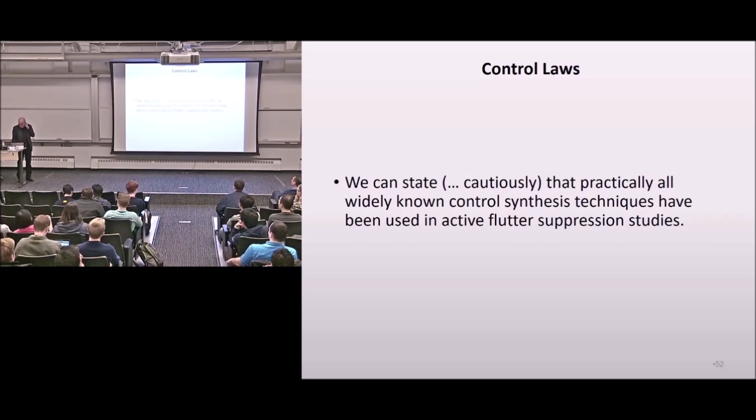This is a 50-year or so effort. I'm not talking about technology that has not been known - we've known about this for at least 50, if not 55 years. It hasn't been implemented yet because of the difficulties, the lack of experience, and the fear - that psychological element, the fear of flutter. From the controls perspective, every possible control synthesis technique has been tried: single input single output, robust control, LQR, LQG, adaptive control - everything, I'm missing maybe a few. I'm going to show you two examples.

This is from the 80s - an F-16 with the problem of external stores. Every time you change the stores, it's a different system, so you need an adaptive system that quickly estimates the structure and modifies the control law to deal with it. They tested this adaptive system over 3.5 weeks, about 6 to 8 hours of testing a day, about 2,500 different variations, and their adaptive controller did the job - it stabilized the system until it didn't.

So I want you to know that in order to certify something like this on an airplane, you need a probability of failure of 10 to the minus 9 to 10 to the minus 12 for anybody to even look seriously at you. So clearly, it's a problem.

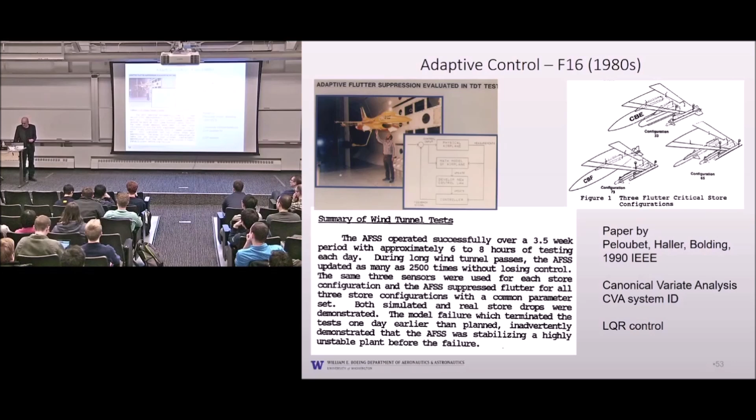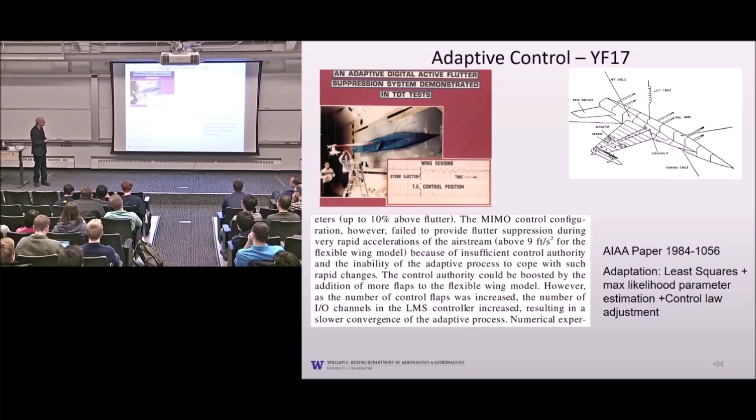Here is a YF-17 in the transonic dynamic tunnel. Again, they did crazy things with it. They had an adaptive controller - I don't want to go into the details of which adaptive controllers they used, this is old technology, there's much better adaptive control now, faster computers, and so on. But again, the same story: the system did a fantastic job ejecting missiles, changing Mach numbers, changing dynamic pressures, until it didn't. It turns out that if you increase the dynamic pressure too fast, it couldn't do it, and it failed.

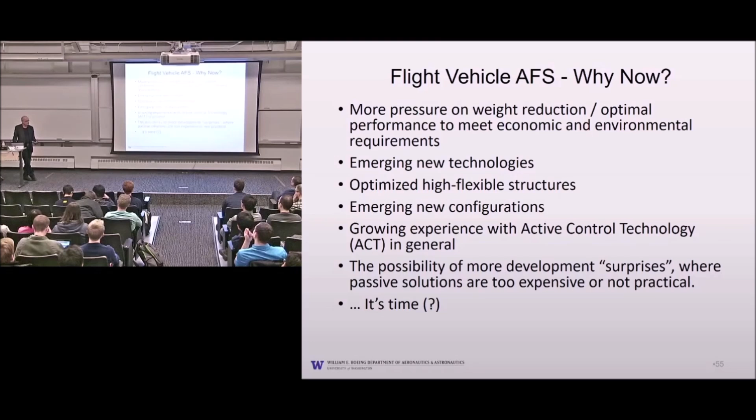So way to go. I talked already about why the increased interest now - much more technology, much more knowledge. The drive for better vehicles is relentless: less weight, better fuel efficiency. If you can use active flutter suppression and save weight on airplanes, the levels that I showed you from my PhD - even a fraction of this would make a huge difference. So there's a lot of interest in this capability.

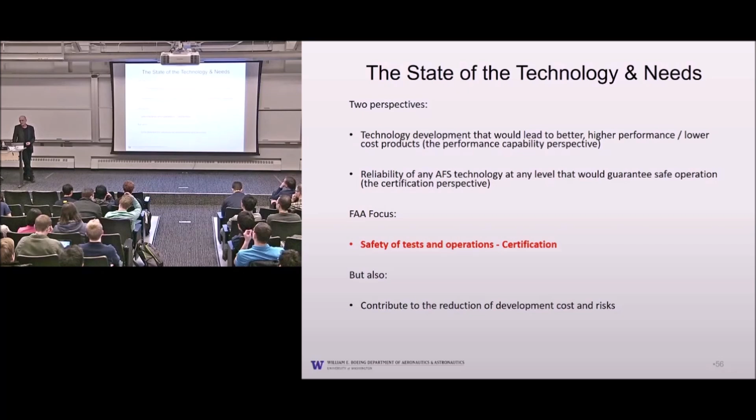But for the FAA, there is one major interest, and that is safety. The FAA, as a US government agency, is interested in helping the industry develop technology, but their number one consideration is safety. So when I say on the road to certification, what do we really need? We need to address the issue of safety and certification, and without this, it would not be accepted.

The cases I described to you, the Boeing cases, are exceptional because if the system fails, nothing is going to happen to the airplane - the airplanes are going to be completely safe. But if you want to build an airplane from the start depending on an active flutter suppression system in order to reap these weight benefits, you better make sure this practically never fails. Not only in cases of moderate flutter, not only mild flutter, but violent flutter. Remember what it looks like when flutter is violent and you lose your control system for a minute? It's not going to be nice, it's not going to be pleasant.

So we need to establish such levels of accuracy of analysis and testing, and such margins of safety, that we guarantee we know what we're doing. We have to have widely accepted math modeling techniques and design techniques that ensure we cover all possible critical cases. Remember the F100? They did everything right, except they forgot that afterburners would heat the fluid of the servo actuators, causing loss of stiffness, and they lost 7 tails.

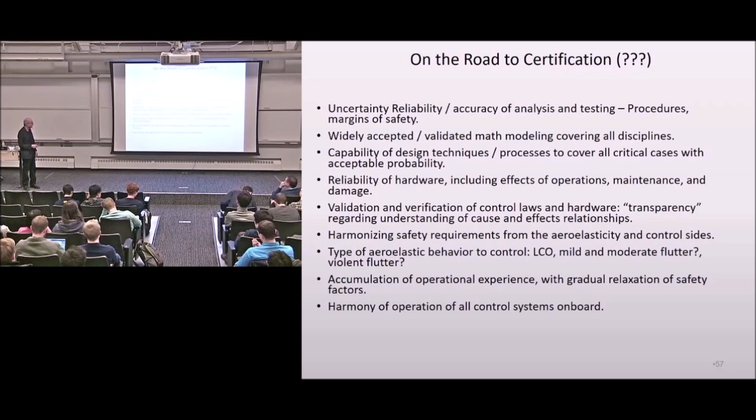We have to accumulate operational experience, and we have to make sure that all the active systems on the airplane are sound. As Perit said at the beginning, I've been actually working with the FAA on this, and realizing that a lot of work has been done, that the generation of giants has been passing away, that you guys may not know even what has been done.

I wrote this paper, and it was published in the Journal of Aircraft. It is free, open access. So I paid a little more money, and each one of you can download it for free from the AIAA. In order to do a search, you know what DOI is, the digital object identifier. Every publication, every paper has a digital object identifier number, DOI. So look for this DOI number. Just do a Google search, look for DOI.

10.2514-1.C034442. Get these papers, those of you who are interested, download it. In that paper you will see the history of 50 or 60 years. The paper was a bit wrong, it doesn't have 503 references, it has 703 references. Since we are being taped, I want to correct this little inaccuracy.

Download it and enjoy it. It has a lot of stories about flutter cases, successes and failures. The bibliography is organized in an encyclopedic way, so it's very unusual for journal papers. But before the bibliography, like an encyclopedia, you have a list of topics, like an index of a book.